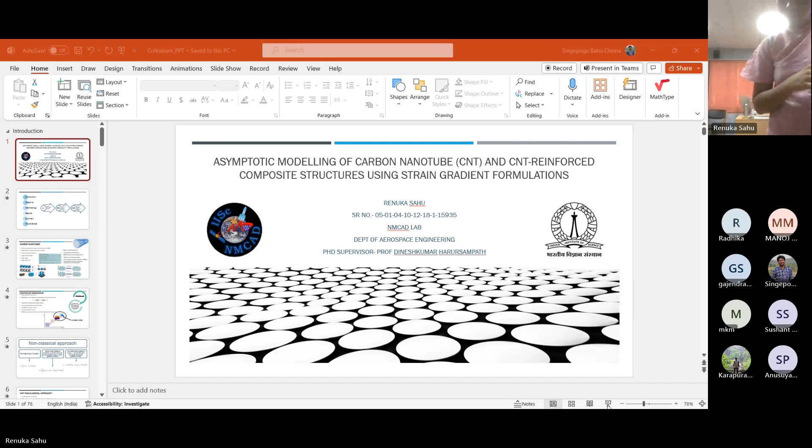Sorry for the delay. So I'll be presenting my work. Moving on, we have divided this whole talk into, as usual, the introduction, objective, methodology, results, and the summary and the future scope. So basically, we'll be starting with a carbon nanotube model, the development of carbon nanotube model in VAM and the buckling studies.

Then we'll move on to a beam model, which is a VAM-based strain gradient model. As you can see, that is the novelty of this work. And we have done bending studies on that. Moving further, we have developed a plate-based model, again a VAM-based strain gradient model. And for that, we have done buckling and bending studies also. So

Starting with carbon nanotubes. So carbon nanotubes, they are recently discovered wonder materials by Ijima. They were discovered in 1991. And depending on the number of tubes and the geometry, they can be classified as single-walled, double-walled, and multi-walled. They are known for having very high Young's modulus, high tensile strength, they are light in weight, and they have high aspect ratio. So these are the mechanical aspects of their properties.

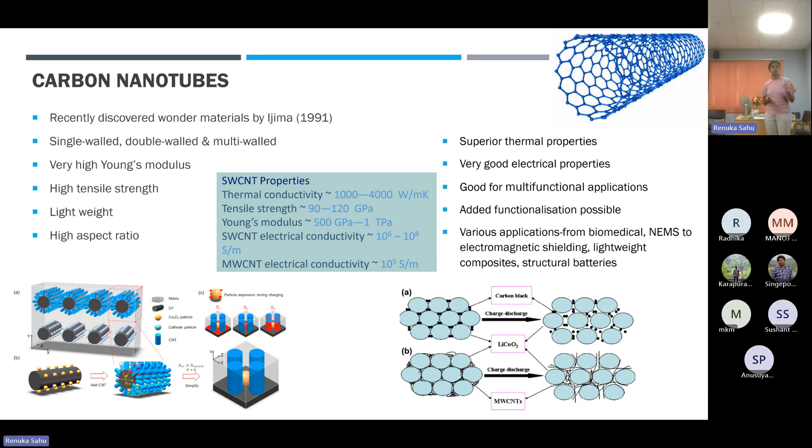Moving on, since we deal with structures, we need to understand continuum mechanics. Continuum mechanics treats a body as a continuum. A continuum can be defined as a continuous and homogeneous substance or material, which can be described by smooth functions and equations without reference to individual atoms or molecules. Because we deal with larger length scales, we are okay with not understanding what is happening at the molecular level. And then the assumption comes into place that stresses at a point depend on displacements at that particular point only. And this is applicable to meso and macro length scales.

And all the existing theories leading to structures are derived from here, like Euler-Bernoulli beam theory or Timoshenko beam theory. But a problem starts to occur as we move to smaller length scales like micro and nano length scales. Now, since in today's world we are going into smaller structures, we have nano-based structures and micro-scale structures, sensors, actuators, and all. It becomes imperative to understand how these structures can be modeled, even in a continuum framework, because we have to study their structural aspects as well.

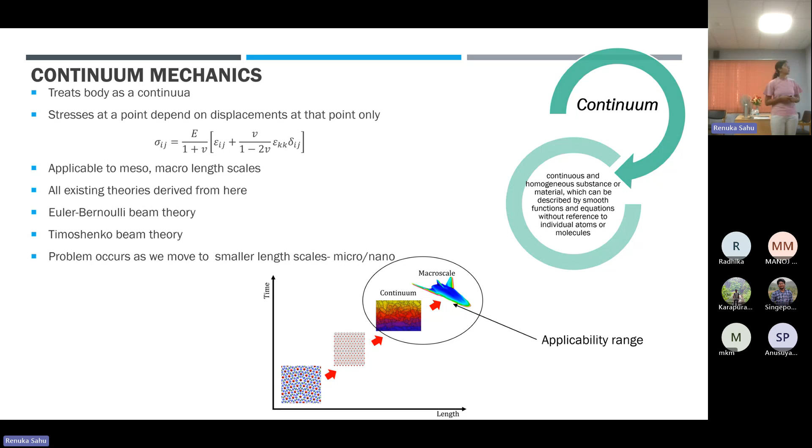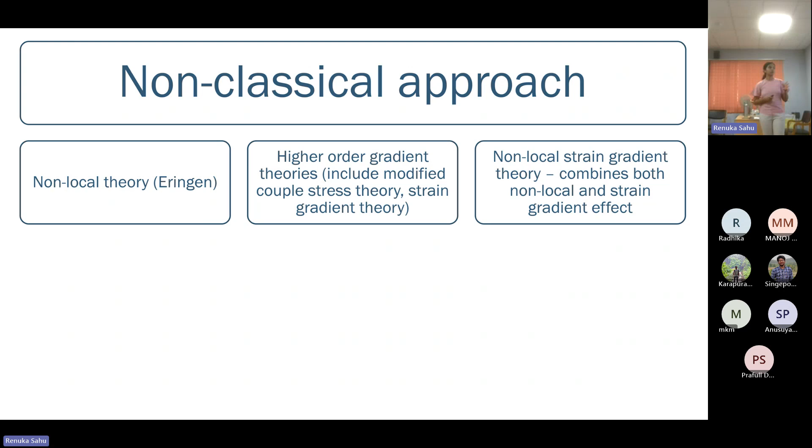And so now, because we have a problem of how to model micro and nano structures, we come to the non-classical approach. Basically, it can be of three types. There is the non-local theory, which is given by Eringen. Here in the non-local theory, the stress not only depends on the displacements at a particular point, but even on the neighboring point displacements. So this is a new definition of stress, which is taken into the non-local theory.

Then we have higher order gradient theories, which include modified couple stress theory or strain gradient theory. Here they include the gradients of the strain in the strain energy definition. The classical strain energy definition goes just up to the first term, but the higher order strain gradient theories consider the gradients of the strain as well when defining the strain energy functional. And then we have a combination of the two, which is the non-local strain gradient theory, wherein the stress is taken from the non-local theory, and the strains and the higher gradients of the strains are also taken. So these are the commonly used theories in literature which comprise the non-classical approach.

But why have a non-classical approach? As I said, in reality, any material or any structure has intermolecular interactions. And the basic assumption of stress locality fails for smaller length scales. The material is definitely not a continuum in reality. Various attractive and repulsive forces exist between these entities, and they will affect the deformational behavior when we go to these smaller length scales. So right now what we are trying to do is come back from materials, go inside to compounds, molecules, and then try to understand what is happening at the molecular level. So our model is moving from millimeters to micrometers and even the nanometer scales.

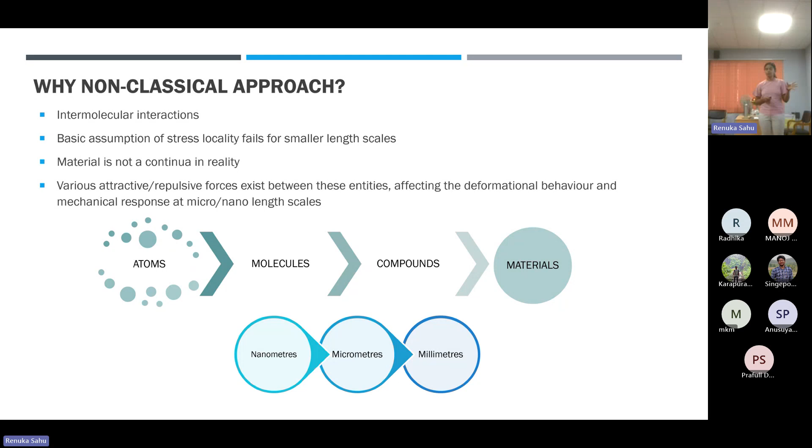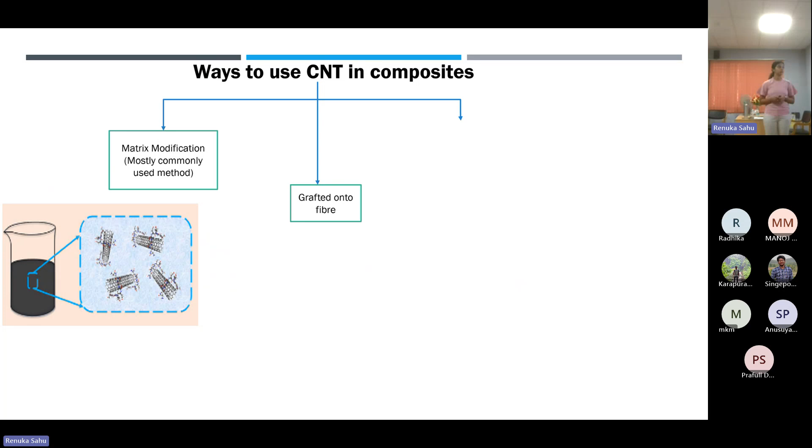And just to know, what are the ways to use CNTs in composites? The most commonly used method is the matrix modification method, wherein CNTs are dispersed into a polymeric matrix, which is then cured and used as a composite structure. And there is one newer way, which is grafting onto fibers. This is a normal composite where you have carbon fiber reinforced into the matrix. But instead of a normal carbon fiber, we have carbon nanotubes grown all around the carbon fibers. This helps to increase the functionality of the carbon fiber, and also helps to increase the transverse properties.

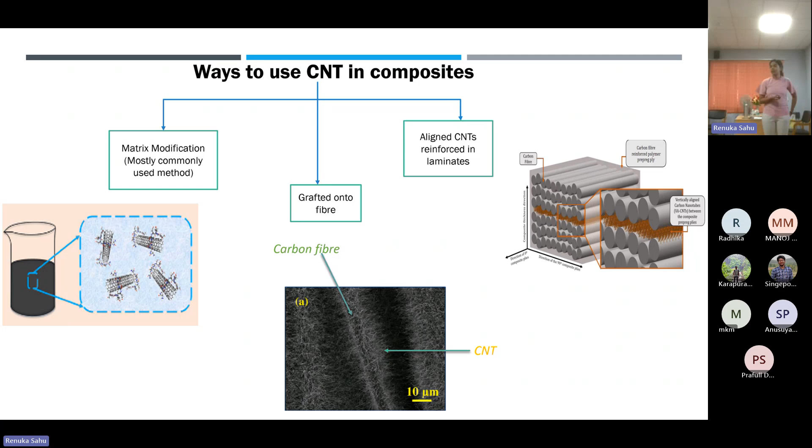Then there are aligned CNTs reinforced in laminates. This is just a larger scale of using carbon nanotubes grafted in composites. This is used for specific applications like improving the interlaminar shear strength or delamination properties of composites.

So the strain gradient theory was first given by Mindlin in 1965. The strain gradient theory states that the strain energy of any material is not only dependent on the stress and strain, but also on the gradients of the strain. This approximation originates from the idea that stress at a point in a continuum is not only because of the deformations at that particular point, but also on the displacements at

the neighboring locations. So the strain gradient theory defines the following higher order strain tensors: the dilatation gradient vector, which represents the change in the volume at a particular point and the gradient of that change in the volume, so the strain associated with that. Then we have the deviatoric stretch gradient tensor, which is the gradient of the strain associated with the stretching of the material at that particular location.

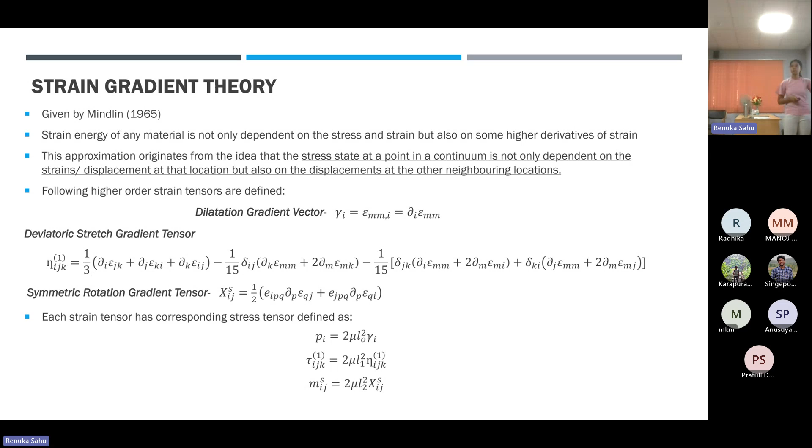The material length scale parameters L0, L1, L2 are a very important part of the modified strain gradient theory. They are introduced in these elasticity problems in addition to the Lamé constants, which are the classical elasticity constants. The physical meaning of the length scale parameter is that it provides a representative size of the strain gradient effect zone in a material, so to what length scale the effect of these gradient vectors is valid. And it is not a constant. It depends on the material as well as the geometry of the structure, and it can be experimentally calibrated.

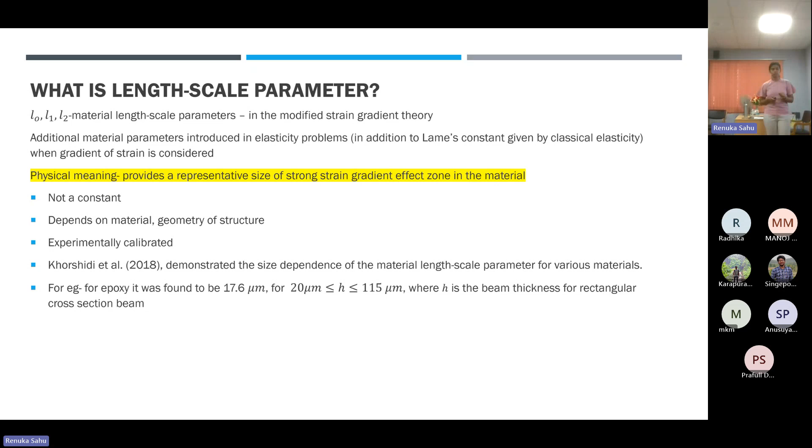Khorshidi et al. demonstrated the size dependence of these material length scale parameters for different materials. It was found that for an epoxy beam with thickness in the range of 20 to 115 micrometers, the length scale parameter was 17.6 micrometers. Usually L0, L1, and L2 are taken to be equal for simplicity; in most of the literature they are taken to be equal and denoted as L.

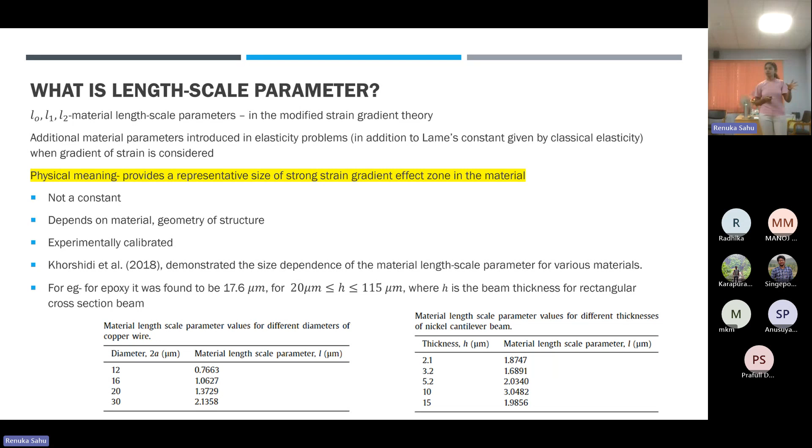Again, for a copper wire, which has a circular geometry, different diameters give different material length scale parameter values. And in the case of nickel, different beam thicknesses give different material length scale parameter values. So depending on what kind of structure you're modeling, you can use those length scale parameter values.

Now the beam theories. We all know that the classical Euler-Bernoulli beam theory and other beam theories describe the bending behavior of the beam using certain assumptions, like plane sections remain plane and the cross sections remain normal to the beam reference line after deformation. But this does not give the exact solution; it does not represent the beam completely exactly. That's why there are modifications to these theories.

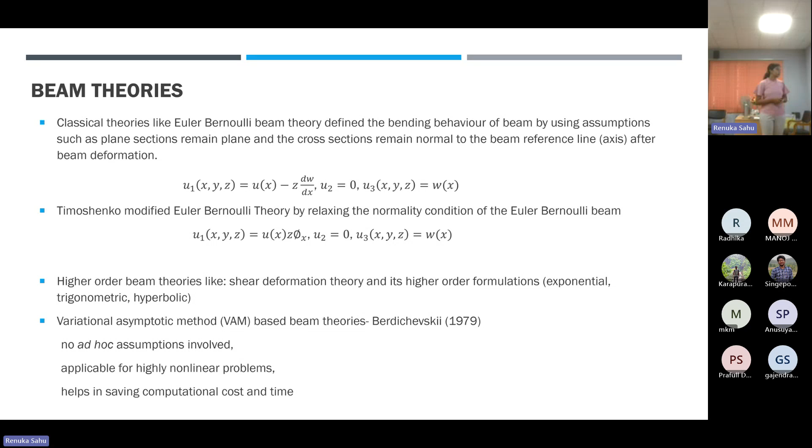Timoshenko modified the Bernoulli beam theory and relaxed the normality condition by considering the transverse shear and other factors. We also have higher order beam theories which consider shear, like the shear deformation theory and other higher formulations. The variational asymptotic based beam theory does not have any ad hoc assumptions. It was given by Berdichevskii in 1979. It is applicable for highly nonlinear problems which cannot be dealt with by the normal beam theories, and it helps save computational cost and time. That's why we are going forward with the variational asymptotic method.

Our objective is to analyze CNT and CNT-based composites using an analytical VAM-based approach. Coming to the literature review we did on carbon nanotubes and strain gradient formulations, the elastic rod model of carbon nanotubes has been studied using non-local theories, wherein different non-local parameters have been tested against molecular simulations to understand which fits better. Then modified strain gradient theory has been used for dynamic study of microbeams, and the effect of CNT orientation and non-local parameter on bending behavior has been analyzed by Eltaher et al.

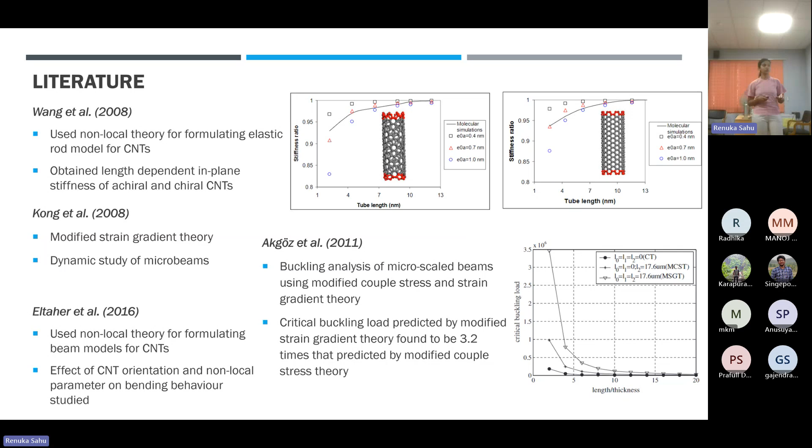And further, by using modified couple stress and strain gradient theory, the buckling analysis of microscale beams has been done, wherein the critical buckling load predicted by modified strain gradient theory was found to be 3.2 times that predicted by the modified couple stress theory, which is again higher than what we get in the normal classical approach. So it shows that we need to modify our existing theories for micro-based and nano-based structures.

Then CNTs have been analyzed using molecular mechanics, and during buckling, a sudden formation of kink and sudden drop in stiffness upon buckling has been shown. And CNTs have been studied under torsion using continuum elastic shell models as well, where nonlinear load deflection and load torsional curves and unstable post-buckling paths have also been obtained.

So Silvestre did a study of buckling of CNTs under axial compression, bending and torsion using FEM and atomistic beam-based theory. They highlighted the importance of CNT geometric parameters, which are the radius and thickness, on the critical load and strain measures. And this plot here is derived from this paper. There they highlighted how upon buckling, the CNT cross-section changes from a circular one to a dumbbell shape. But this is an atomistic based study.

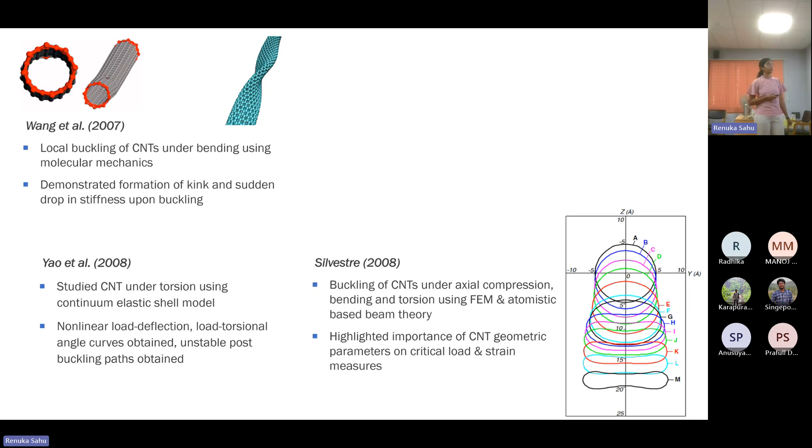And for strain gradient theory, we know that it was developed by Mindlin, and he identified additional material parameters other than Lamé's constants in classical elasticity. Now, the strain gradient theory by Mindlin was further modified by Lam et al. He introduced the modified strain gradient theory, where he reduced the material parameters from 5 to 3 for isotropic materials.

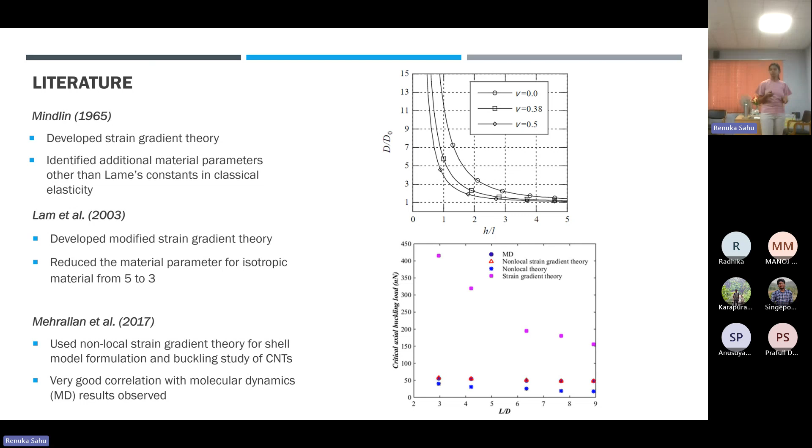And again, non-local strain gradient theory for shell formulations has been used for studying buckling of CNTs. And he was able to get very good correlation with the molecular dynamics study. It shows how the non-classical approach can correlate to the molecular dynamics results as well.

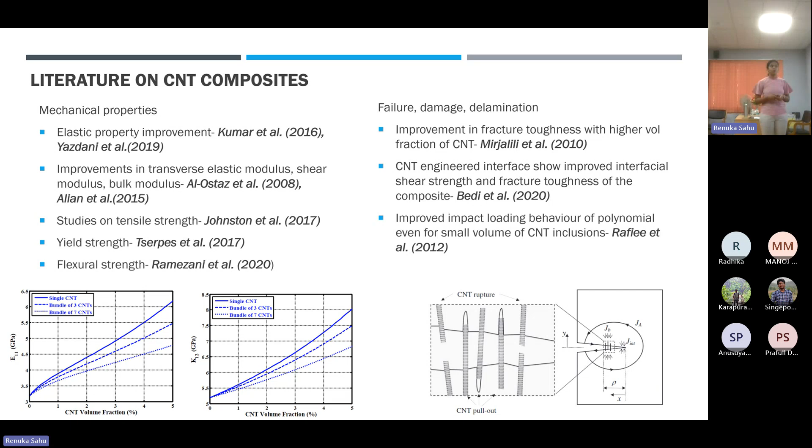And further, CNT composites, definitely because of improvement in mechanical properties. As we are increasing the CNT volume fraction, we are getting good increment in the elastic modulus and the bulk modulus. And even transverse elastic modulus, yield strength, flexural strength, all of these improve. Further, we can use CNTs to improve fracture toughness and interfacial shear strength in composites. And we have the multifunctionality aspect: lightning strike protection, electromagnetic shielding, piezoelectric sensors.

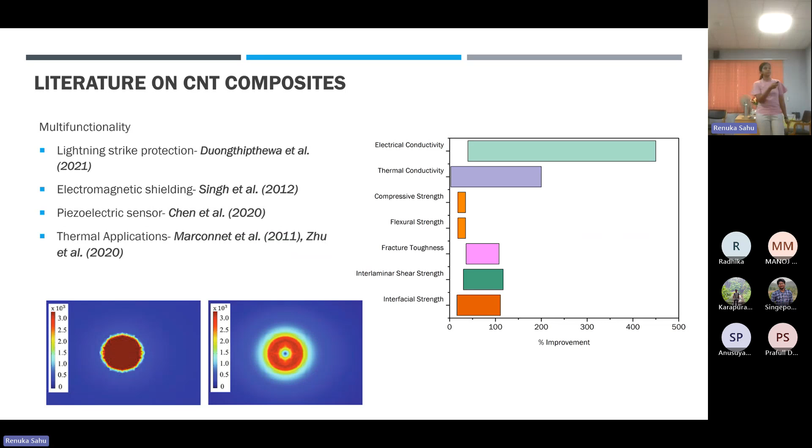So the methodology which we are adopting in our work is the variational asymptotic method. You can understand it as combining variational methods and asymptotic analysis. VAM uses small parameters which are inherent in the problem definition itself. They are used to study beams, plates, and also for homogenization studies. The basic concept is minimization of strain energy.

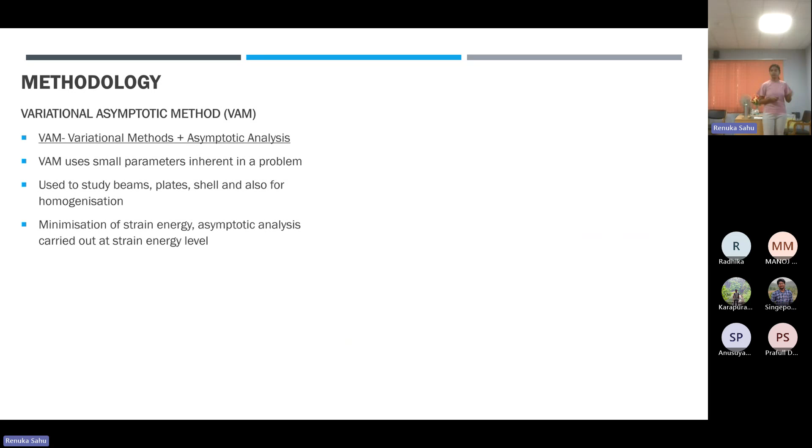So in the VAM analysis, the asymptotic analysis, which is basically separating the terms in terms of different small parameters, is carried out at the strain energy level instead of the differential level, which is the usual case in normal asymptotic analysis. And the order analysis forms an essential part of the model development. VAM can be used to capture geometrically nonlinear behavior like the Brazier effect and trapeze effect. It can also be used to study piezoelectric effects, delamination, electromagnetic, and other multifunctional properties.

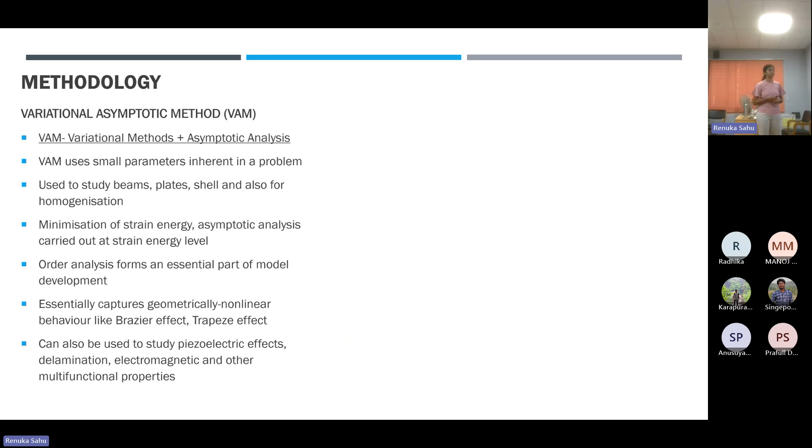So here we have a basic flowchart representing the steps of beam analysis using VAM, wherein we start with a cross-sectional geometry, and we have 3D elastic constants. Moving forward, we do the 2D cross-section analysis by using this order analysis and minimization of strain energy, from which we get the 2D warping and strain recovery relations. And again, we have the load and boundary conditions for the 1D beam.

So from the 2D cross-section analysis, we'll get the 2D elastic and inertial constants, the basic stiffness matrix, which is fed into the 1D beam analysis to get the 1D displacements, strain and stress results. And both of these are combined to get the whole 3D recovery analysis and to get the 3D strain and displacement relations.

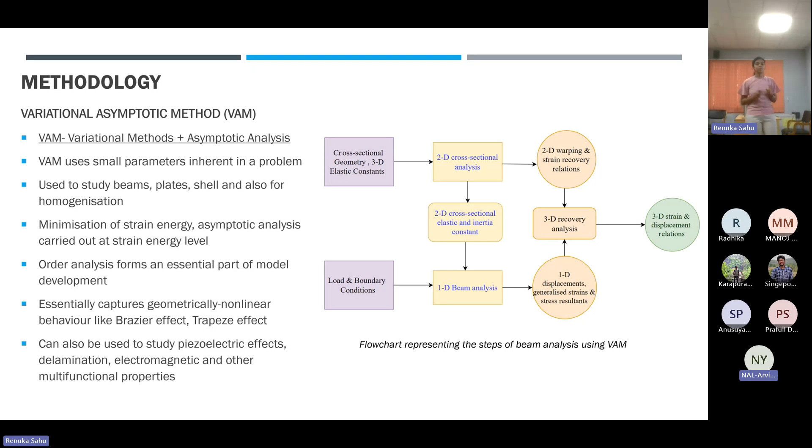So we can model a whole 3D structure using VAM. The kinematic relations are represented here. So here is a schematic representing the undeformed and deformed configuration with the coordinate systems used for beams. So we have a reference line r representing the beam in undeformed and capital R in the deformed states. And the unit vectors b1, b2, b3 are in the undeformed state. And similarly, capital B1, B2, B3 are in the deformed state.

And this is a general approach which is done in any VAM-based formulation. And we can relate the deformed and undeformed position vectors using the covariant and contravariant vectors. And we will establish a geometrically nonlinear 3D kinematics by using 3D strain definitions and deformation gradient tensor as given here.

So then once we have established the kinematic relations, we come to the order analysis part. So order analysis is the most important part of the asymptotic study. And it is done at the cross-section analysis level for the beams. For plates, it will be done at the thickness level. And based on the geometry, the small parameters are identified and the problem is divided according to it. So the small parameters, they can be usually geometric or physical small parameters. And depending on different cross sections, we have listed out the small parameters used.

So for rectangular cross section, the b by L, where b is the width of the beam and capital L is the length of the beam. For circular cross section, the small parameter will be radius to length ratio. And for strip-like cross sections, where the order of beam width and beam thickness is very different, we'll have two small parameters, the width to length ratio and the thickness to the beam width ratio. And similarly, for thin hollow cross sections, we will have radius to length ratio and thickness to radius ratio as the small parameter. And for physical small parameter, we consider the strain as the physical small parameter.

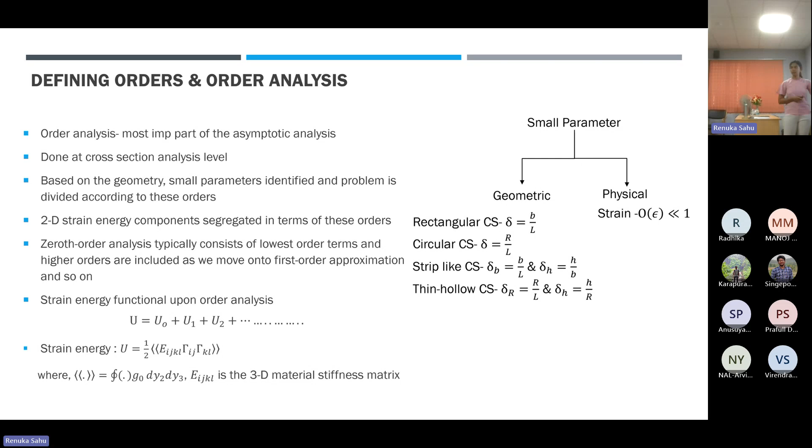So this is the whole flowchart explaining the zeroth order approximation, wherein you start with the position vectors, you get the covariant and contravariant vectors, and you obtain the deformation gradient tensor. Once you get the deformation gradient tensor, it is used to get the 3D strains, and order analysis is done based on small parameters, and the strain energy expressions in terms of small parameters are derived. Then we go for minimization of strain energy and we get the boundary value problem. And solving that boundary value problem, we can obtain the warping solutions. And once we have the warping solutions, again feeding those into the 3D strains, we can get the strain energy for the particular problem.

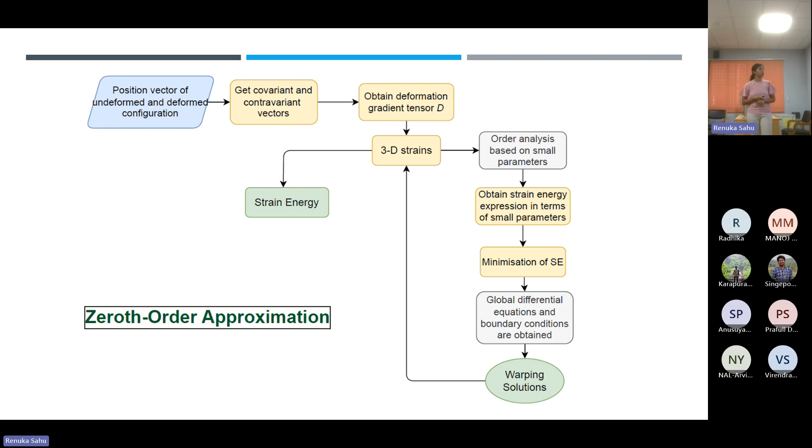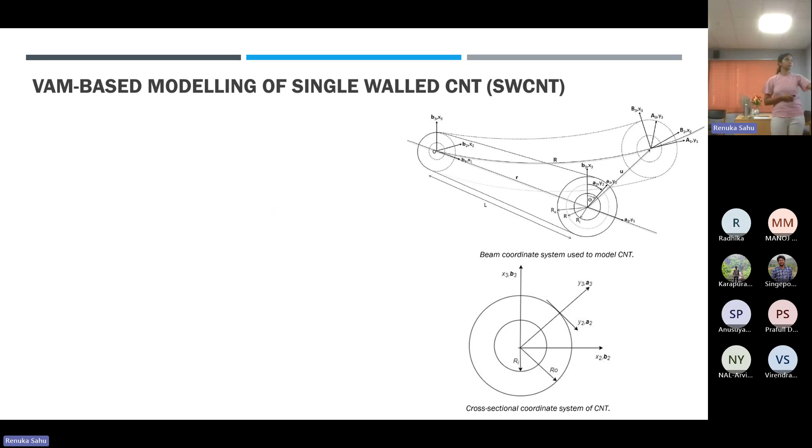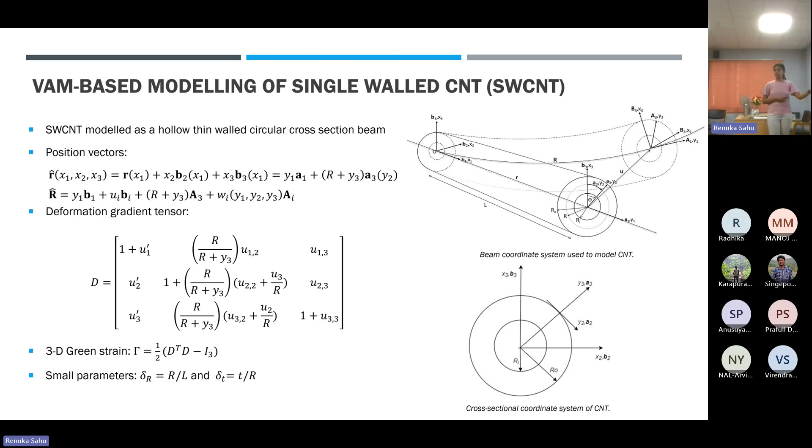So first of all, I would like to discuss the VAM-based modeling of single-walled CNTs. So here is the beam coordinate system, which was used to model single-walled carbon nanotubes. This is a hollow thin cross-section beam, and you can see the cross-section coordinate systems also, where Ri is the inner radius and Ro is the outer radius. And so we are considering the single-walled carbon nanotubes as a very thin, hollow, thin-walled circular cross-section. These are the position vectors using which we'll get the deformation gradient tensor. And using the 3D Green strain definition, we can obtain the 3D strains. And here, as I discussed previously, the small parameters are radius to length ratio and the thickness to radius ratio.

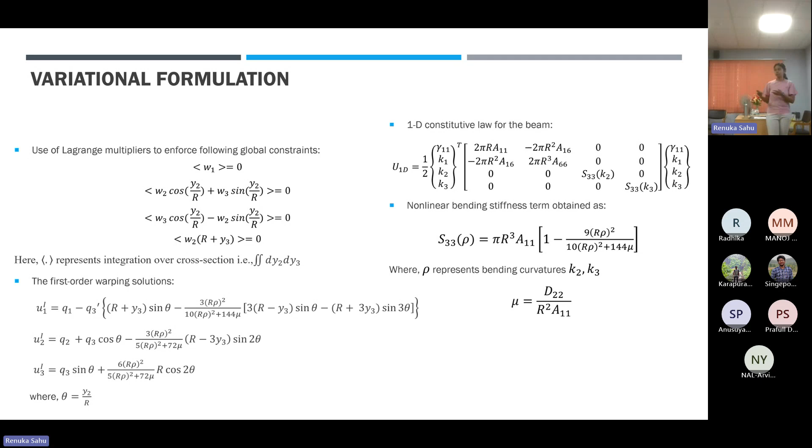So this means that the stiffness depends on the curvature of the beam, showing that once you apply a load, the curvature changes and the stiffness also changes. So there is a rapid change in stiffness of the beam as we continue applying the load. So to solve this problem for the 1D beam, we use the 1D nonlinear analysis using a finite element approach, and we use the mixed variational formulation.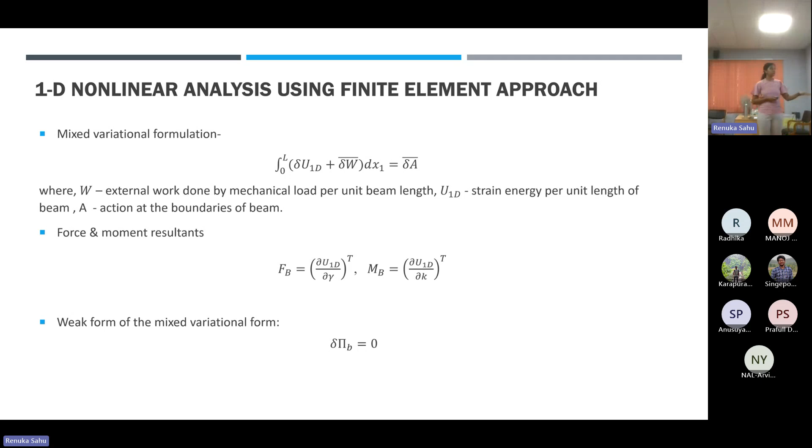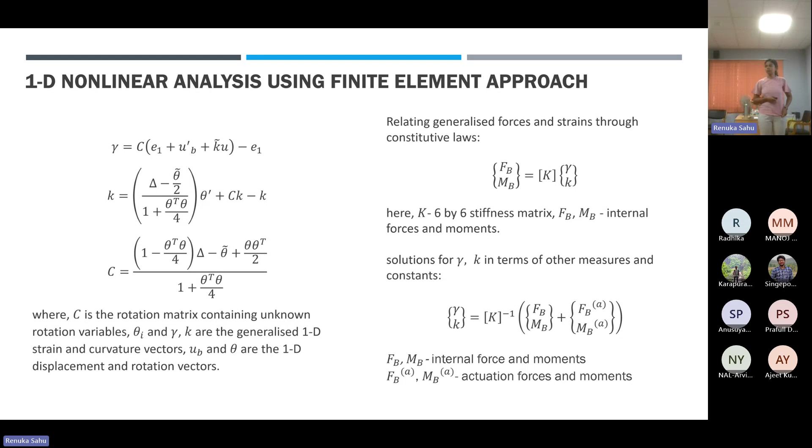We have the definition of force and moment resultants as follows. And using the weak form of the mixed variational formulation, we can again relate the 1D strains to the displacements and rotation vectors. So here are the relations for the 1D strain and the displacements and the rotation vectors. And using all these definitions, we can get a generalized force and strain through the constitutive law. And solving for gamma and kappa in terms of other measures and constants, we finally get this equation, which is then solved further. So now we have the equation to solve.

So we studied CNT buckling using VAM. Here we have an axial buckling force versus transverse displacement plot. So here you can see that a simple axial compression load was applied, and up to some point, like point A, the behavior was linear. But after point A, where the buckling starts, you get a very huge transverse displacement even for a very small, infinitesimal increase in the force. So that means the instability has occurred and the structure has buckled.

So corresponding to all these points, point A, point B, and point C, we also have the cross-sectional shapes of the beam, which are usually not obtainable using the normal beam theories. And here we can see that at the buckling onset, there is a slight change from the circular cross-section. And when you move to points B and C, which are post-buckling points, you will see that the CNT has an oval and a dumbbell kind of shape, showing highly nonlinear behavior. So this geometric nonlinearity in the form of cross-sectional ovalization is observed. We have captured this effect of nonlinearity for buckling loads.

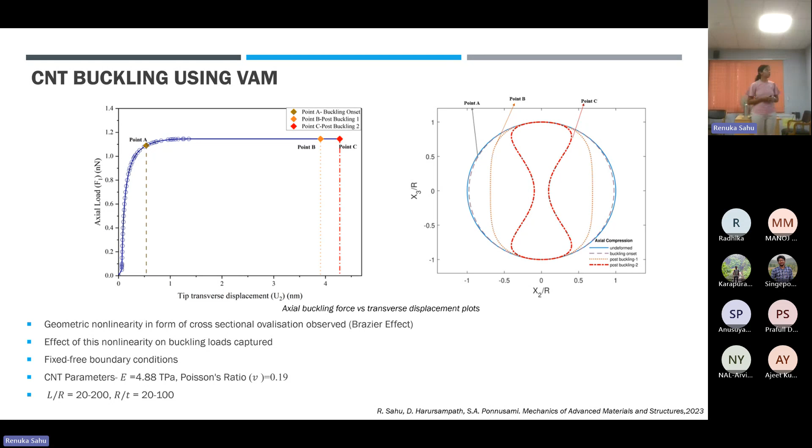So the boundary condition used here was fixed-free, where one end was fixed and the other end was free. And these are the CNT parameters used. And for the complete study, we have taken the length to radius and radius to thickness ratios in this range. And we have also done literature validation, wherein the first work we validated with was a non-local shell-based model.

And we can see that the current work gives very good correlation with the non-local shell model for the 0.722 non-local parameter, and also with the molecular dynamics result, which was already used in the paper itself. And as we can see, with the increasing nanotube aspect ratio, the buckling load is decreasing.

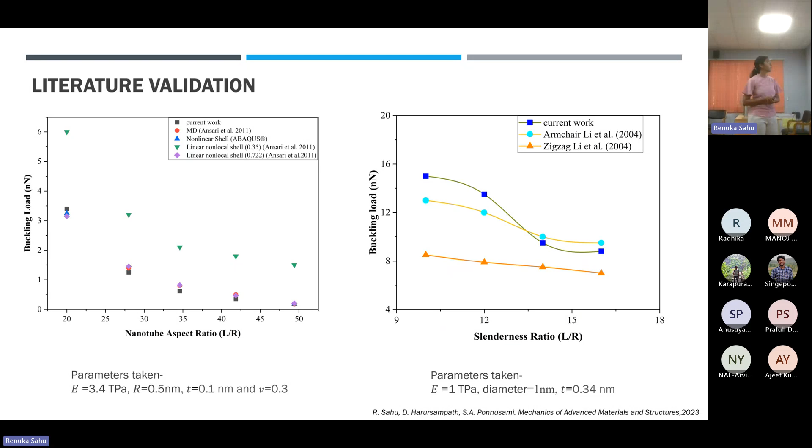And further, this work by Li et al. is a molecular structural mechanics based approach. And here also the buckling load variation with slenderness ratio was captured. And we can see that the current work agrees well with the molecular structural mechanics approach as well. More or less, it agrees more with the armchair configuration of CNT rather than the zigzag configuration. And we have also validated with other methods, and also for combined loading cases of twist and compression, and we were able to get good correlation with the literature here as well.

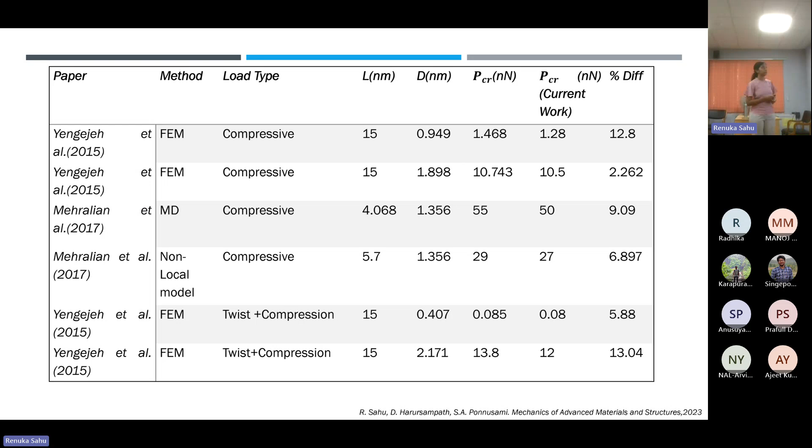We have also done a parametric study, wherein we have seen how the buckling load varies with the radius to thickness ratio and the length to radius ratio. Keeping the thickness constant and varying the radius, we obtained this variation for two cases: one where cross-sectional non-linearity is considered, and one where it is not. For pure axial compressive buckling, the variation is not much, but at higher radius to thickness ratios, there is a larger difference between the buckling loads for the two cases.

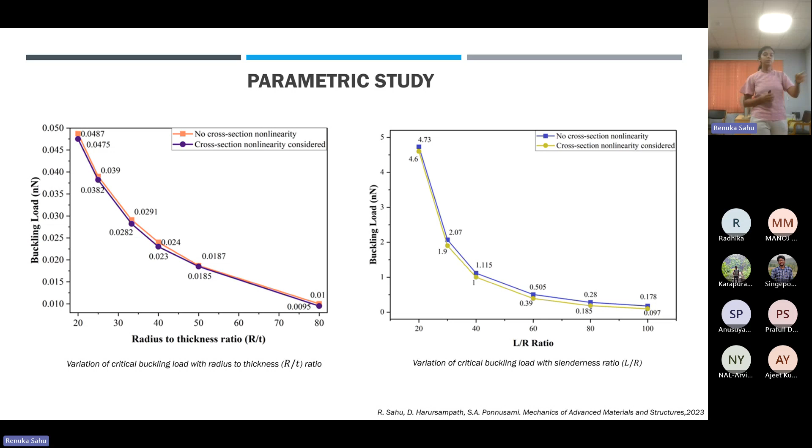We have also done variation of critical buckling load with slenderness ratio, keeping the radius of the CNT constant. The difference between the cross-sectional nonlinear and no cross-sectional nonlinear case is quite evident, and for higher L/R ratio, meaning a higher length of CNT, there is much more difference between the two cases.

Then we have done the combined loading cases, where we take bending and compression into account. For this case, we first apply a uniformly distributed bending load, and then incrementally apply the compressive load. We have again done a parametric study, wherein the radius to thickness variation is considered.

As the R/T ratio increases, the cross-section of the CNT also becomes highly nonlinear. For smaller R/T ratios, there is not much difference between the two cases of no nonlinearity and with nonlinearity. But for higher R/T ratios, a bigger radius of CNT with smaller thickness gives much more nonlinear behavior in the cross-section.

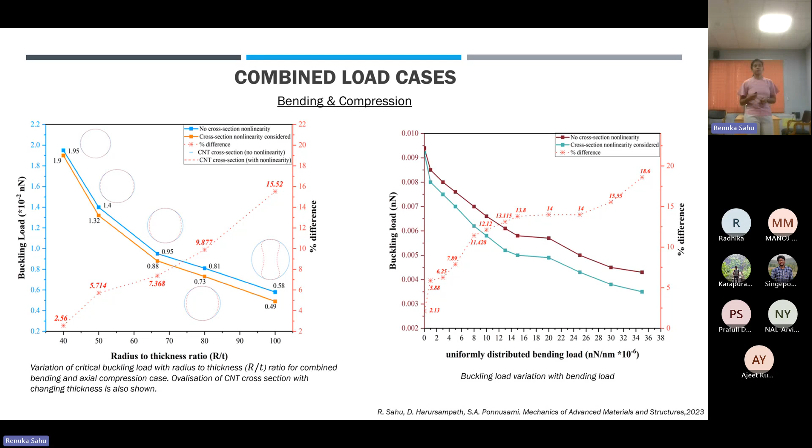We have also studied how the buckling load varies with the applied bending load. Bending load has a larger contribution to the difference between the cross-section ovalization and linear cross-section model. We can see how the different bending loads for the two cases, no cross-section nonlinearity and cross-section nonlinearity, have been compared, and this shows that bending load has a higher impact.

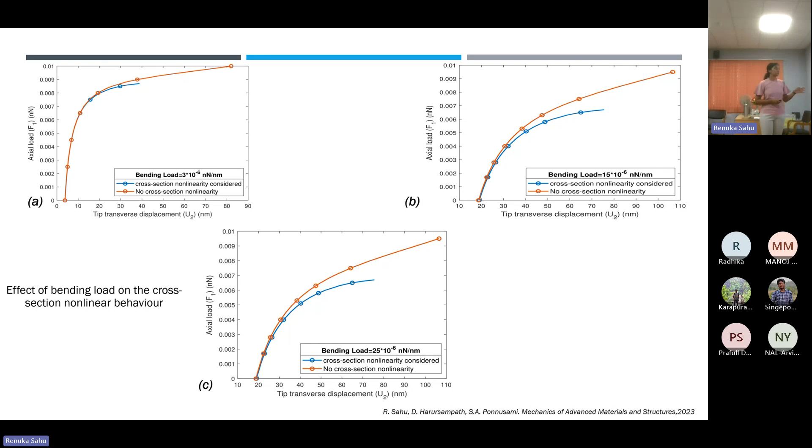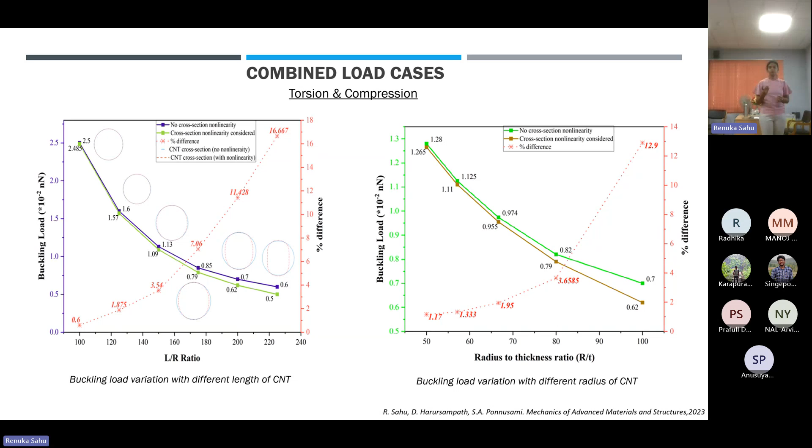Similarly, we did the torsion and compression case. Here, instead of the bending load, we are applying a twist also. Again, for this case, we studied the variation with slenderness ratio and the variation with radius to thickness ratio of the buckling load, and the same conclusion can be derived: for higher length of CNT and higher radius to thickness ratio, there is larger difference between the nonlinear cross-section and linear cross-section cases.

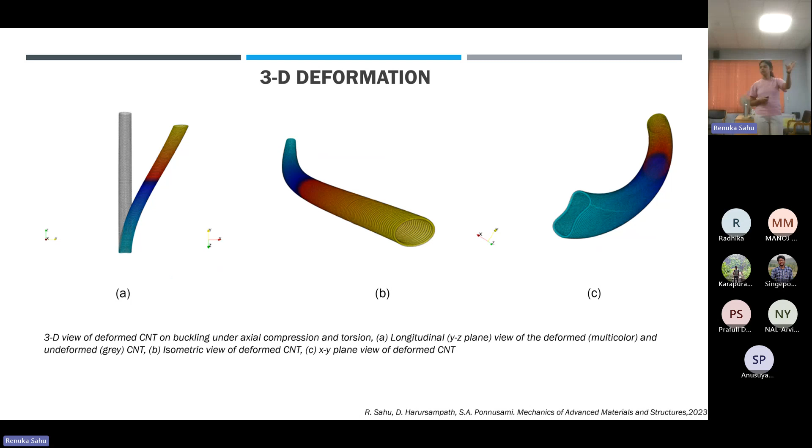Similarly, we also got the 3D plots for the same torsion and compression case, where you can see the out-of-plane displacement also due to the twist.

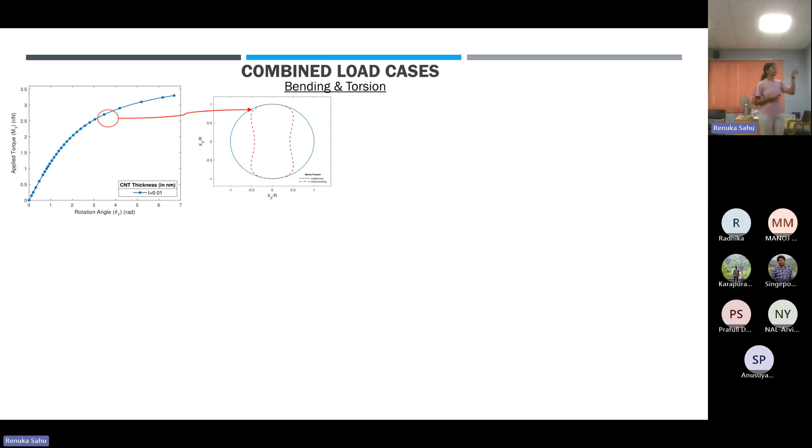We have also done a combined load case of bending and torsion. Here, instead of taking the transverse displacement, we have the rotation angle plotted with respect to the applied torque, and we have a similar kind of behavior. We are using fixed-free boundary conditions: first we apply the distributed bending load, and then incremental torque is applied at the free end.

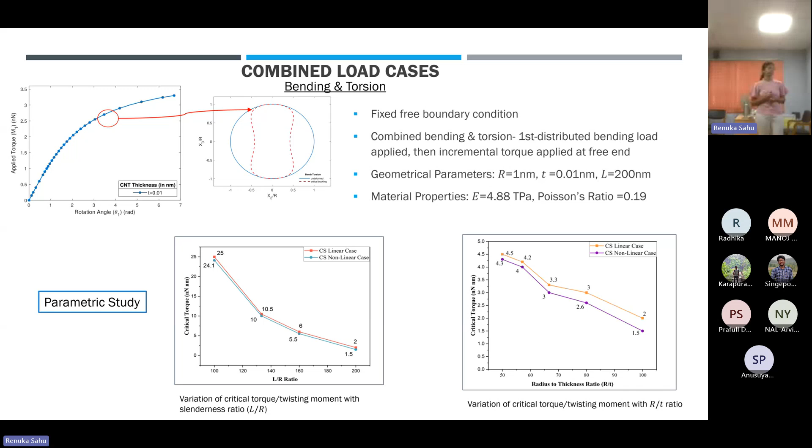We have done the same parametric studies here as well, and the difference is evident even for the bending and torsion cases: for higher L/R ratios and higher R/T ratios, it becomes important to consider the cross-section nonlinearity of CNT while modeling them. The 3D deformations for this case have also been obtained.

Now we come to the strain gradient formulation for prismatic beams. As discussed previously, the modified strain gradient theory is an extension of Mindlin strain gradient theory given by Lam, and this is what we are using in our variational asymptotic formulation.

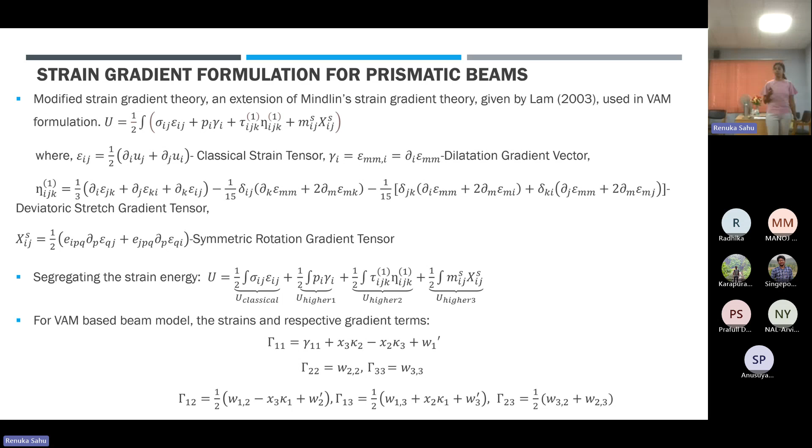Here we have the strain energy definition, where we have the classical strain tensor, dilatation gradient vector, the deviatoric stretch gradient tensor, and the symmetric rotation gradient tensor. We have segregated the strain energy in terms of classical, higher first case, which corresponds to the dilatation gradient vector, higher second case, which corresponds to the deviatoric stretch tensor, and higher third, which is the symmetric rotation tensor. We start with the classical strain terms, given here, and then move on to the higher gradient strain terms, for which we have obtained these particular expressions using the definitions of these gradient strain tensors.

And then using the definitions of the strain, we come to the order analysis part of the variational asymptotic method. So we need to consider what kind of small parameters can be used in this particular problem.

Since we are taking a prismatic beam, we have the small parameter width to length ratio from the geometry of the beam. But now we also need to consider another small parameter, which we are introducing as delta m, the material length scale parameter to the length of the beam. And we have applied the following warping constraints. So now we need to understand what can be the order for the material length scale parameters.

We have taken 3 different cases. In the first case, we take the order of the length scale parameter to be much less than the order of the width of the beam. For this case, we get the following strain energy orders: the classical strain energy order is given, and all the higher gradient strain energies associated with the gradient strains come to be one order higher than the classical strain. So this is one particular case.

We again took another case where the length scale parameter is taken to be equal to the beam length. For this case, the higher order energies have lower order compared to the classical strain energy. And for the third case, where the material length scale parameter order equals the beam width, the classical strain energy and the gradient higher order strain energies come to be of the same order.

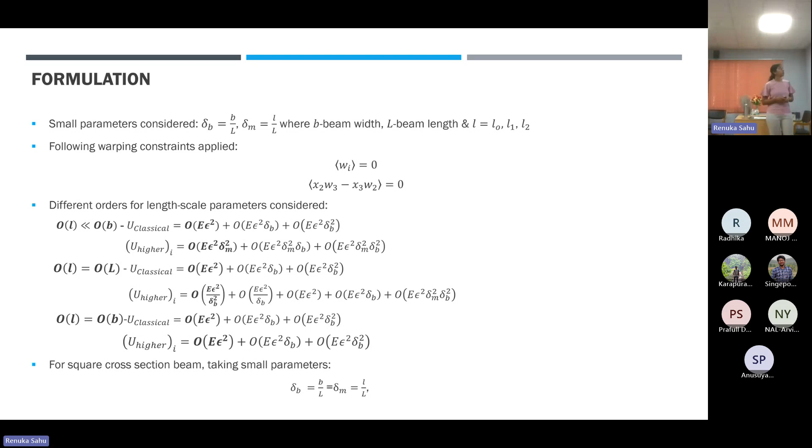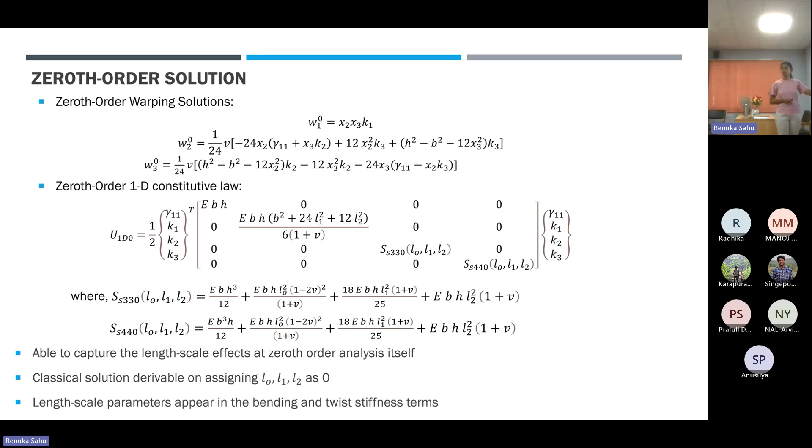And if you assign L0, L1, L2 as 0, we are able to get the classical results. So this proves that the model is working fine. And it can be clearly seen that the length scale parameters appear in the bending stiffness terms and the twist stiffness terms, so these behaviors are much more impacted by the length scale parameters.

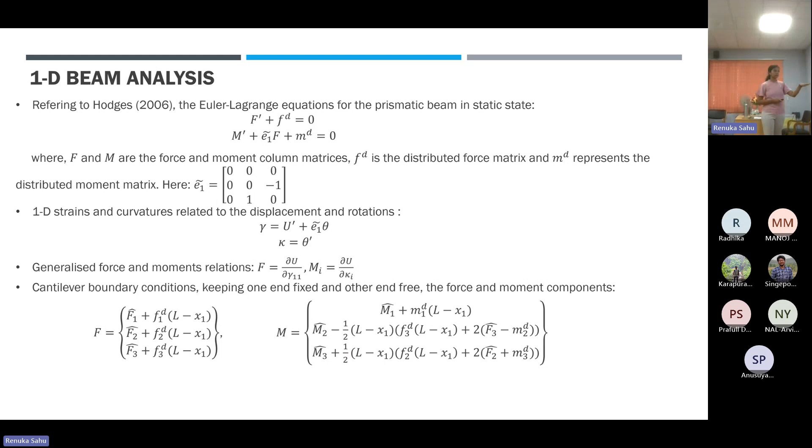Further, referring to Hodges and using the Euler-Lagrange equations for a prismatic beam in static state, we do the 1D beam analysis here, wherein the force and moment vectors are given as follows. We have the 1D strain and curvature relations to the displacements and rotations, and we can get these generalized force and moment relations.

So we did the literature validation of our work with Zhou et al. We analyzed the variation of normalized bending rigidity, wherein normalized bending rigidity is the bending rigidity with respect to classical bending rigidity. Here we have the H by L star ratio, and L star is as defined here, because that was the kind of formulation used in the literature. So we move forward with that.

And this is for a zero Poisson's ratio case. We also plotted the difference between the current model and Zhou et al. for different Poisson's ratios.

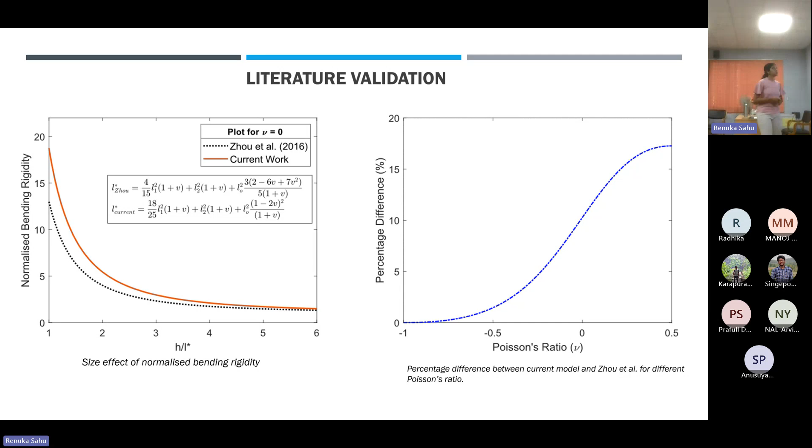Moving on, we did the first order approximation also, wherein the zeroth order warping solutions were perturbed to include one order higher terms. Then we get the first order warping solutions doing the same variational formulation, and again we get the 1D constitutive law.

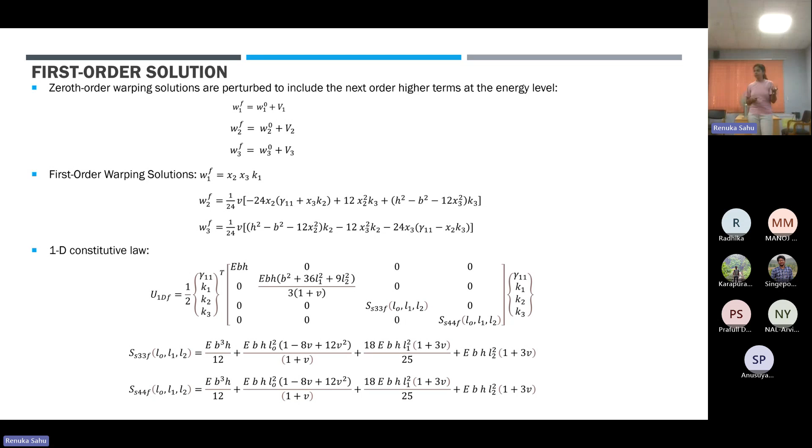So here again, the same kind of behavior is there, wherein the material length scale parameters appear in the twist and bending stiffness terms. But here, an addition is that you have a Poisson's effect coming into picture in the first order analysis. This is different from the first order VAM analysis, where only the twist stiffness term is affected by the Poisson's effect. But here, bending stiffness terms are also being affected.

Using the results, we have obtained the bending deflection of a cantilever epoxy microbeam, and we have varied the thickness of the beam to study how the bending deflection is varying.

So this is the boundary condition and the geometric parameters used for a study and the loading conditions.

Here you can see that for a thickness of 10 micrometers, the classical results give much higher bending deflection, and the current work, which uses the strain gradient model, gives a lower bending deflection, showing that the beam has stiffened, or at micro scale, the beam behaves in a much more stiffened manner.

Similarly, if you move to 20 micrometers of thickness, the difference between the classical and the current work reduces. And if you keep on increasing the thickness of the beam, the difference keeps on reducing, showing that as you increase the length scale of the structure, the difference between the classical and the strain gradient model reduces.

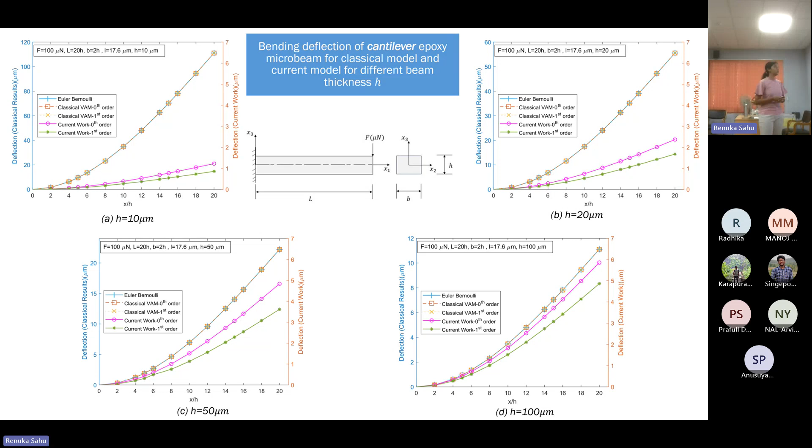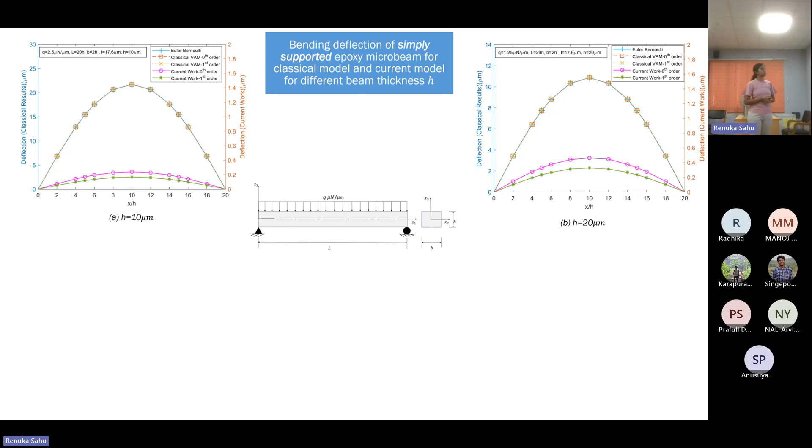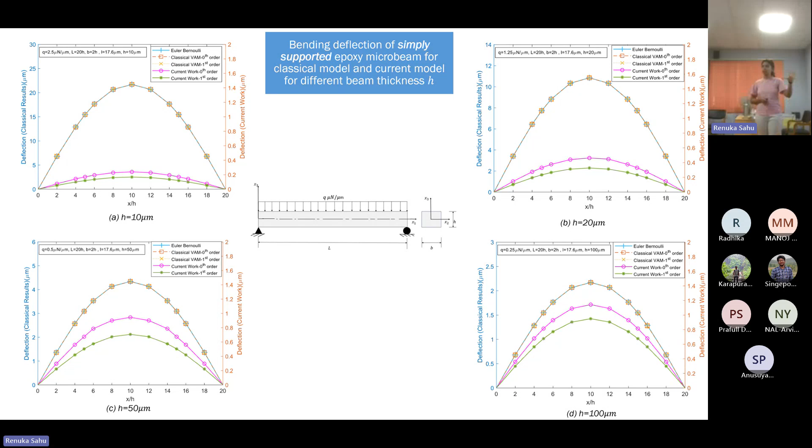We have done the same thing for the simply supported epoxy microbeam, and we have applied a distributed, uniformly distributed load. Again, the same kind of behavior can be observed here, that starting from 10 micrometers thickness of the beam, you will have a huge difference between the classical and the current work, wherein as you increase the thickness or the size of the structure, the difference keeps on reducing.

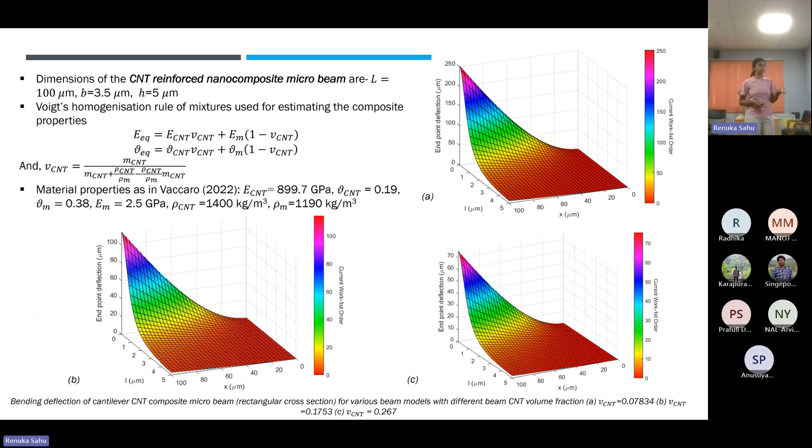Now we come to the strain gradient formulation for plates. Again, here we start with the same kinematic relations, but here for plates we have the following position vectors in deformed and undeformed configuration. We obtain the deformation gradient tensor and move forward to the 3D Green strains.

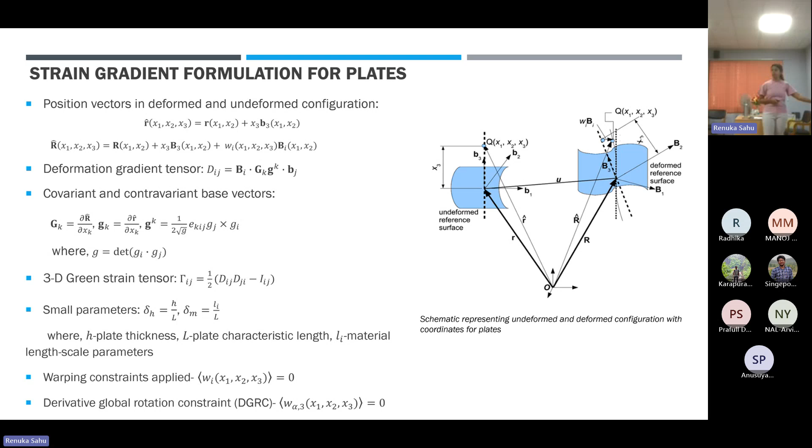Here for plates, the small parameter which we have taken is the plate thickness to the plate characteristic length, which can either be the length or the width. And we have the material length scale parameter to the length ratio. The following warping constraints have been applied for the variational formulation.

So we have taken the orders based on the classical VAM plate model, that the H by L small parameter is taken to be the same order of the strain, and delta square is a bookkeeping parameter here.

Again for this we have tried to analyze different orders of the length scale parameters. So here, instead of taking the beam width as for beams, here we are considering the plate thickness. We have taken the first case wherein the material length scale parameter order is very less than the order of the plate thickness. We obtain similar kind of behavior wherein the higher order energy is of a higher order than the classical strain energy.

For the material length scale parameter equal to the length of the plate, we get a lower order of strain gradient strain energy. For the same order as the thickness of the plate, we get both of them to have the same order. We have taken this particular case and moved forward with our formulation.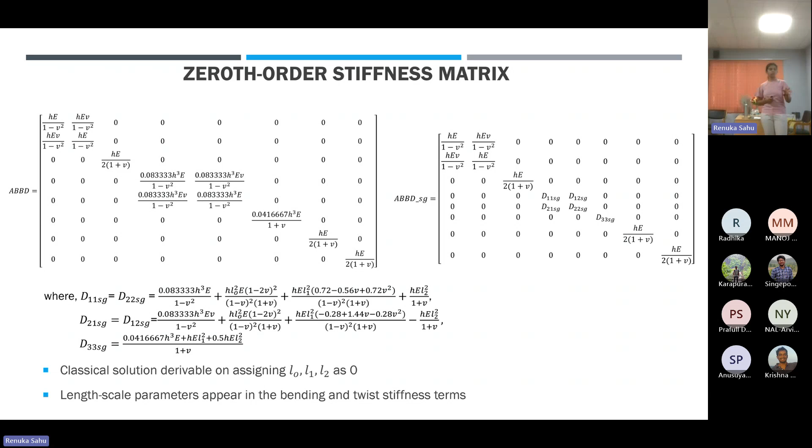We can see that we have material length scale parameters appearing again in the bending stiffness systems and the twist stiffness systems. Again, we can derive the classical solutions once we assign L0, L1, L2 as 0. The length scale parameters are appearing in the bending and twist stiffness terms.

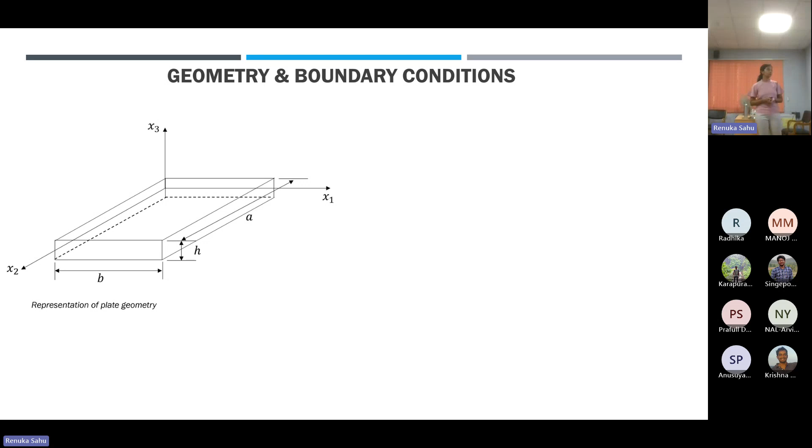Moving further, we do the 2D nonlinear analysis for the plate, wherein this is the representation of the plate geometry that we have taken. These are the boundary conditions which we have considered, and these are the relations for the boundary conditions which we have used.

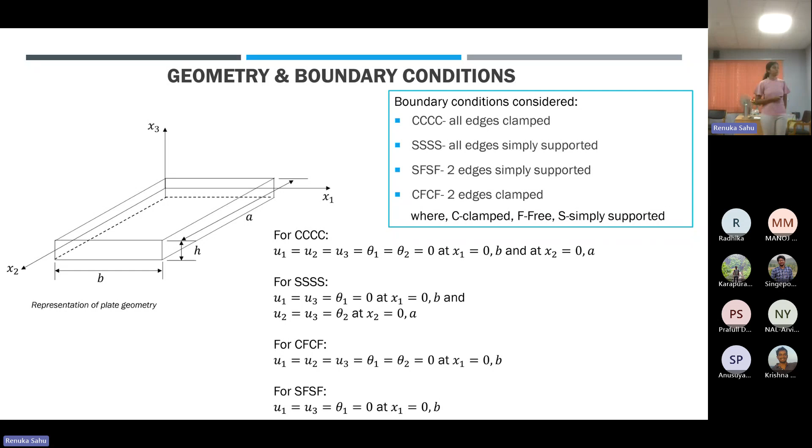So now we have studied the bending deflection of all edges clamped epoxy microplate for the classical model and for the current model for different plate thicknesses. So the first graph has considered 15 and 20 micrometers of plate thickness, and we have applied a distributed load on the plate. So here you can see the difference between the classical and the current work. And as we move on to higher thickness values of 30, 45 and 60, 75 micrometers, the difference reduces.

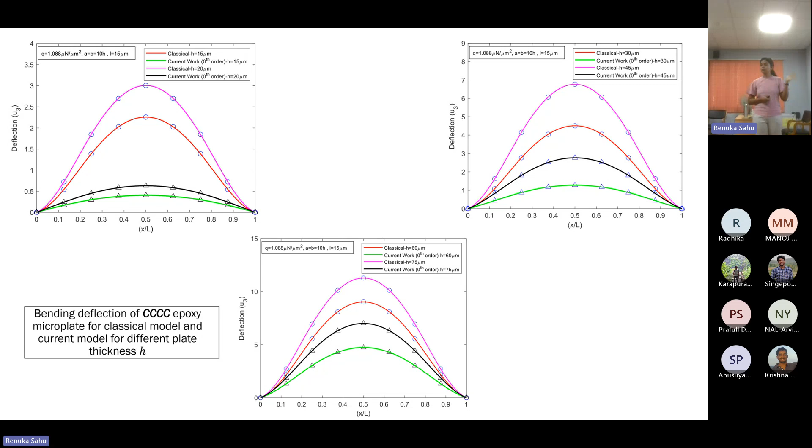We have also obtained the 3D bending deformations of the epoxy microplate for the current model and for different boundary conditions. H, the plate thickness, and the material length scale parameters are kept the same in all of these models. So you can see the least deflection is given by the all edges clamped case, then the all edges simply supported, and the clamped free, 2 edges clamped case gives the higher deflection.

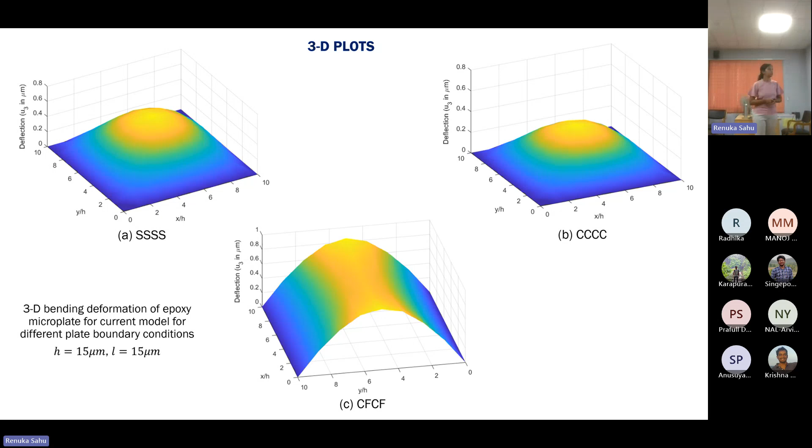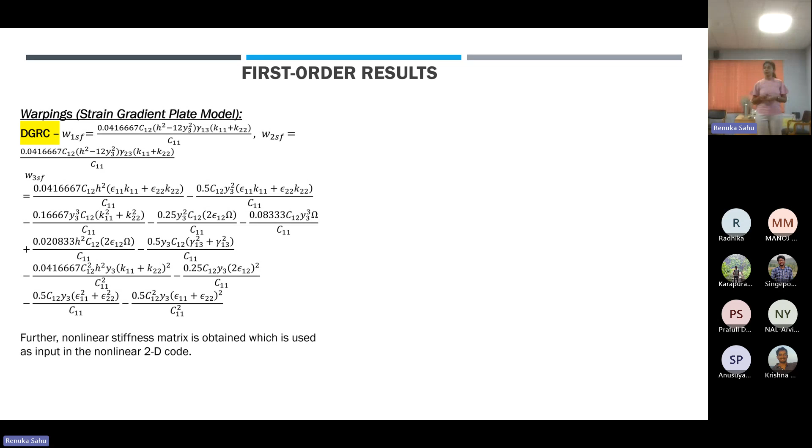We have also done buckling studies wherein we have considered the parameters h by L, the variation with respect to thickness and material length scale parameter ratio, and variation with different plate width and thickness ratios. So here we can see for zeroth order how the buckling load varies as we increase the plate thickness. For h by L equals 1, there is a huge difference between the buckling load for the classical case and current case, because it is a smaller structure where taking the effect of strain gradients becomes very important. But if you increase the thickness to 5 times the material length scale parameter, the difference between the classical and current model reduces.

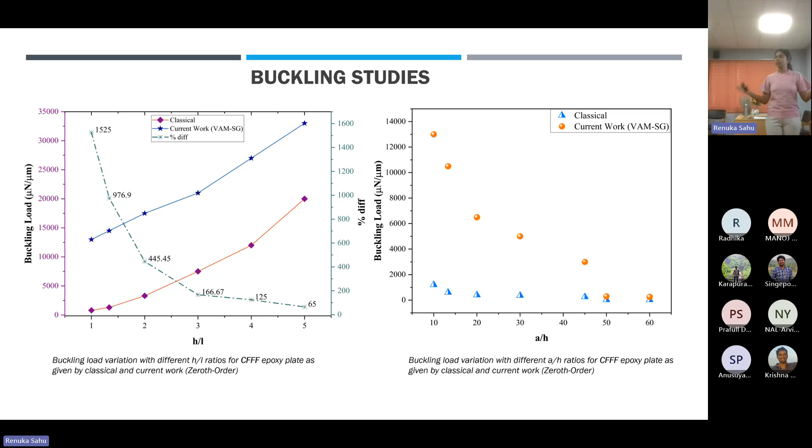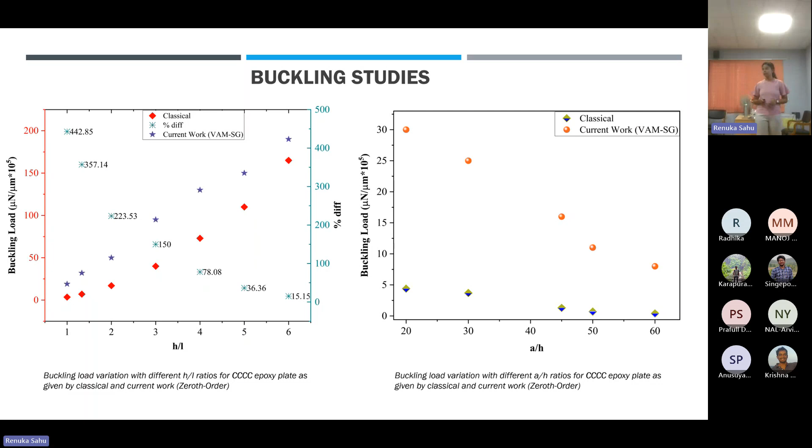Similarly, as we go for higher A by H ratios, wherein H is kept constant and A is varying, we can see that as the plate size increases, the difference between classical and current model goes on reducing. Similarly, the same study has been done for all edges clamped also, and here also a similar kind of behavior is seen.

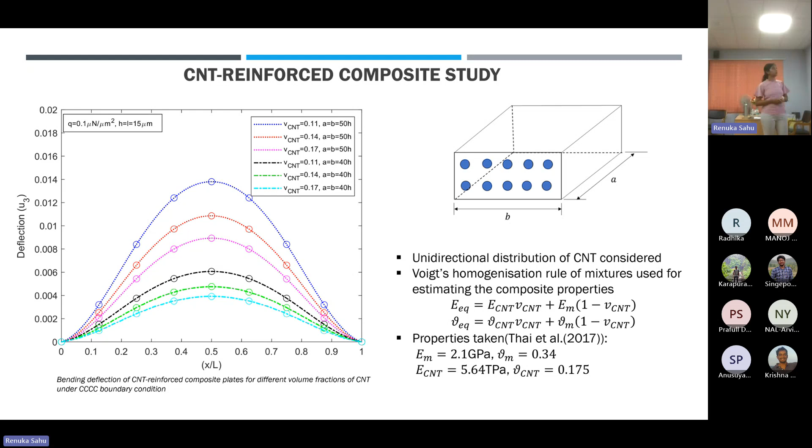So to summarize the whole work, we have studied carbon nanotubes using VAM, and we have accounted for the nonlinear cross-sectional deformation, and we have highlighted its crucial role in the premature failure under buckling and in combined loads as well. And we have proposed a nonlinear modeling method using VAM and FEA that provides a much more engineer-friendly way to study nonlinear behavior of carbon nanotubes and other nanostructures as opposed to atomistic modeling methods, which might take much more computational effort and time.

And a novel beam model incorporating both zeroth order and first order, integrating the modified strain gradient theory into the VAM framework, has been developed for prismatic beams. And the bending behavior has been analyzed, showing a stiffening behavior of the beam. And the bending stiffness dependency on Poisson's ratio at first order approximation has also been shown here.

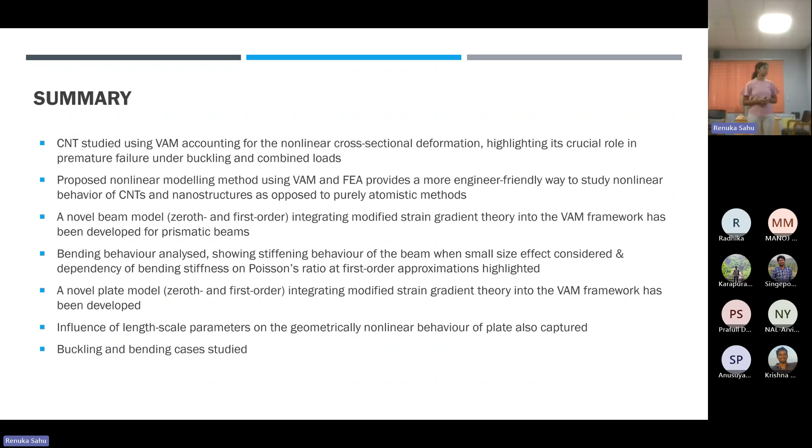And a novel plate model, again integrating the strain gradient theory into the VAM framework for both zeroth order and first order analysis, has been developed. And the influence of length scale parameters on the geometrically nonlinear behavior has also been captured in the first order approximation. And we have studied buckling and bending cases.

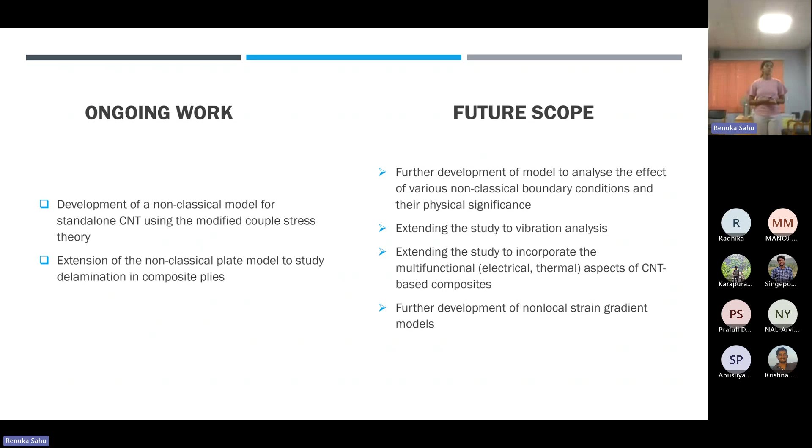So there is also ongoing work on development of a non-classical model for standalone CNT using modified couple stress theory, and the extension of this non-classical model to study delamination in composite plies. And further, we can extend this work to include the effect of various non-classical boundary conditions and their physical significance, and extend the study to vibration and other dynamic analysis. And we can incorporate multifunctional aspects of CNT-based composites. And since we have developed a strain gradient model, we can further develop a non-local strain gradient model for beams and plates.

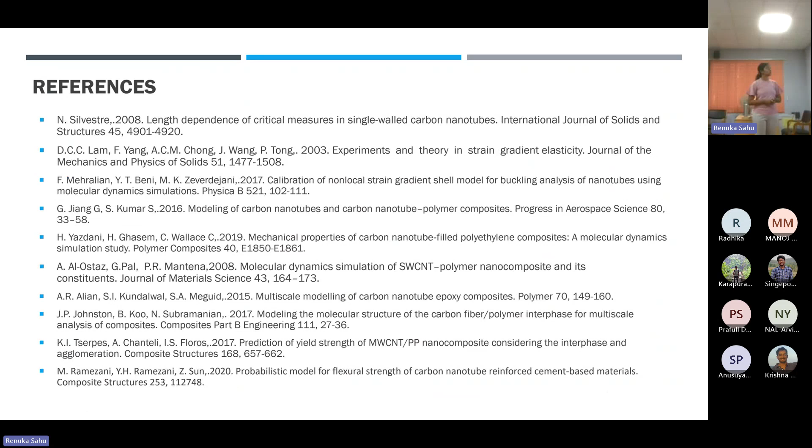Finally, I would like to extend my heartfelt gratitude to Professor Dineshkumar Harursampath for always being there and supporting no matter what. And Professor Satish Kumar sir for being the best mentor there can be and always coming up with solutions and steering in the right direction. Professor Ramesh Gupta for his wisdom and guidance, especially in the plate models. And Professor R. Narasimhan, Professor Anindya Deb, Professor M.R. Bhat, and Professor Joseph Mathew, who were the panel for my comprehensive exams, and they helped with their suggestions and feedback. Professor Swarnendu Sil of the Maths Department for helping with the intricacies of variational formulation while modeling the strain gradient formulation. IGSTC and Airbus for providing an incredible opportunity. My parents and my siblings for always being there for me even in the worst times. And my lab mates for helping out in every possible way they can. And my friends for making the time in IISc a very good one. Thank you for listening.

You gave a very good presentation. From the industrial point of view, where is this carbon nanotube concept used right now in the aerospace industry? So with my work during Airbus, I have seen people trying to incorporate these carbon nanotubes for thermal protection systems, and they are also trying to use them for sensors. They have certain sensor-based applications wherein very small microwave structures are used. So instead of using another material, they are trying to incorporate carbon nanotubes into these sensor models. And mostly they're looking for multifunctional applications to improve the current aerospace structures.